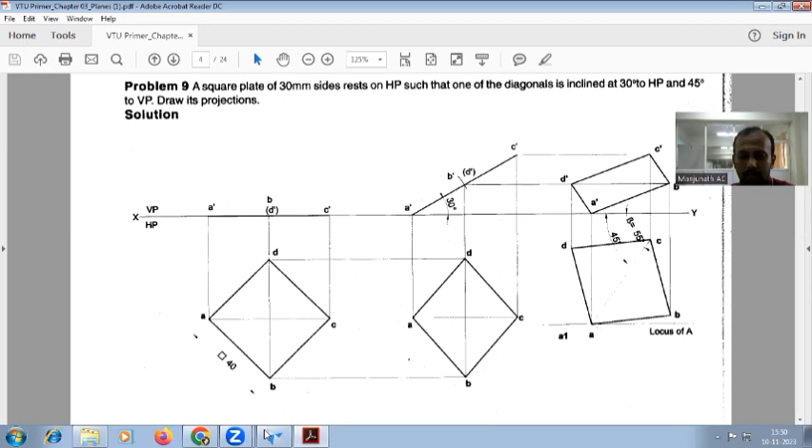So let's start the diagram. Choose the rectangle command. Give the width as 30 and height also 30. If you give the angle 0 degrees, the square will come with respect to edge. If you give 45 degrees, the square will be converted to corner. Our requirement is with respect to corner, so give the angle 45 degrees here. So the square will come with respect to corner. You can check the dimension of any one side, 30 according to the question.

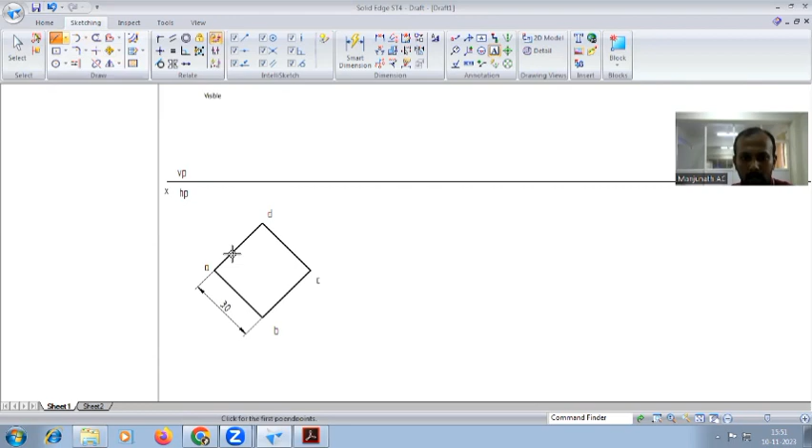So go for naming. This is A, this is B, this is C, and this is D. So the top view of the square plate is over. Next, you can go for the front view, projection of all the lines to the XY line. Projection of B and D in the same line, projection of A and projection of C. The projection lines' thickness will be less. So go for smart dimension and check one side of the dimension.

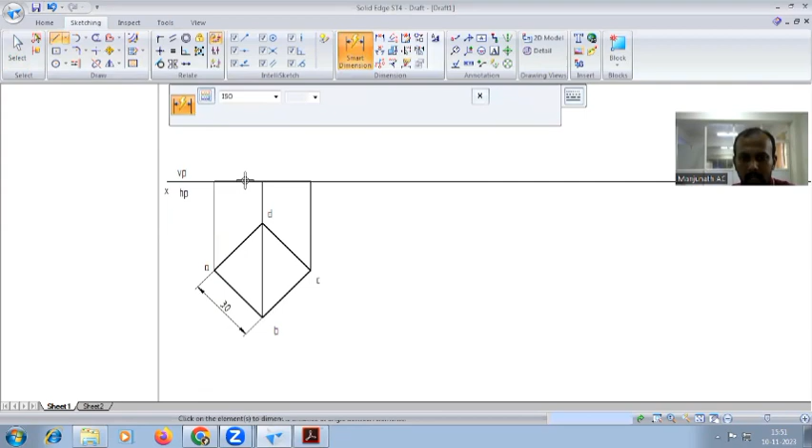After this, you can go for line command and select the projection of A to the projection of BD and projection of C. You can draw two lines here. You can go for smart dimension and check it. Both are 21.21, 21.21, the same distance.

Okay, go for the naming. This is the projection of A, this is A dash. This is B dash, and also D dash. D dash is not visible, so inside the bracket, and this is C dash.

So next position, you have to incline the plate at 30 degrees to HP. How to incline? Go for the line command. This line is initially 0 degrees; you have to incline it to 30 degrees. What is the distance? 21.21, 21.21. Select the XY line, give the length 21.21, enter, angle is 30 degrees. Again 21.21, enter, angle 30 degrees.

So go for the smart dimension. If you want, you can check this one, 21.21 and also 21.21. Check the angle also with respect to the XY line. So this line to XY line is 30 degrees. So now you can go for the projection of top view. This is the front view after inclining to 30 degrees.

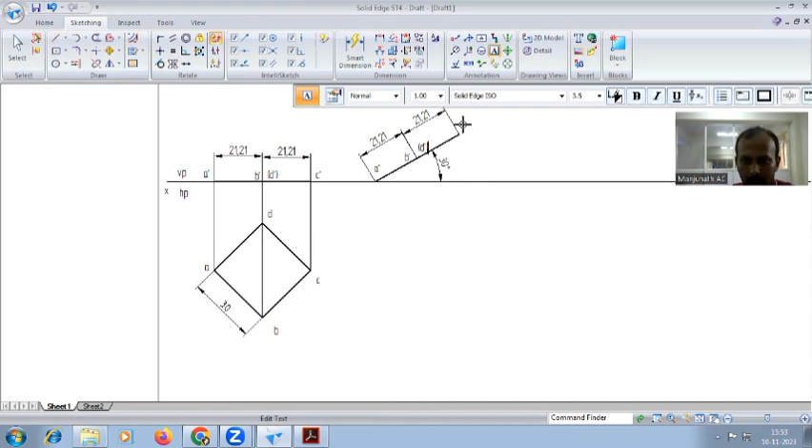Before that, naming is very important. This is A dash, this is B dash, and this one inside the bracket is D dash. And finally this one is C dash. Naming will be the same as it is. You have to type it, and then go for the projection. Projection of A, projection of B and D. You can see the endpoint symbol, projection of C. Projection of A, B, D, and C.

So look at the endpoint symbol. If it does not come, you can switch on the IntelliSketch. All IntelliSketch options should be switched on. So this is the projection of A to the first line. Next, projection of B to the second line. Projection of C, you can extend this line to the third line. Then the last one, projection of D. Always choose the endpoints. You'll get the 4 points.

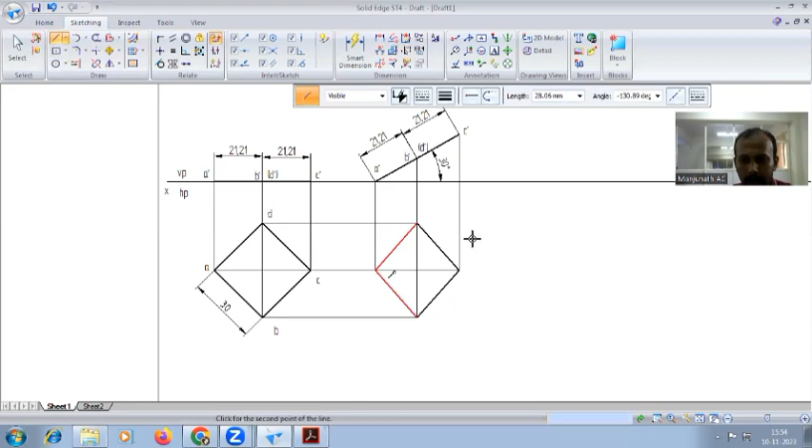If you want, you can go for trim command and trim this, so all the lines will easily get endpoints. Go for line command. Change the thickness to 0.5. So from point A, endpoint to point B, to point C, to point D, and to point A. So this is the square after inclining to 30 degrees. Naming A, B, C, and D without dashes in the top view.

And finally, one of its diagonals is inclined. For the diagonal, you always have to consider the left reference point. So A is the reference point. So from A, which diagonal passes? AC is the diagonal.

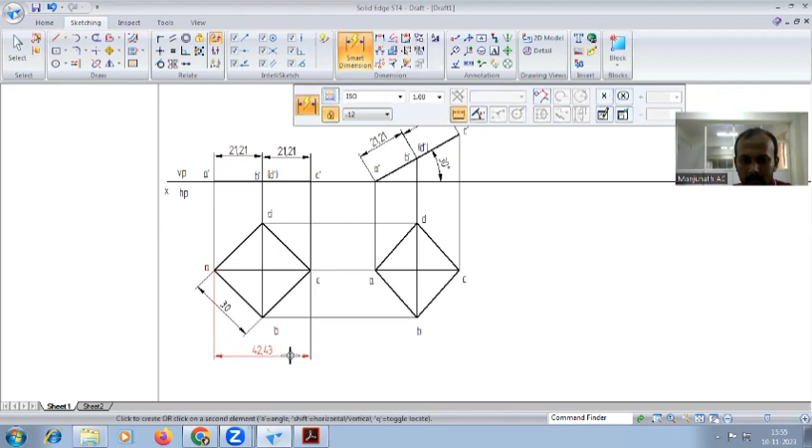You have to draw the separate diagonal line here. So A to C, one diagonal line, endpoint to endpoint, and here also A to C. So here we check the smart dimension. This dimension is different. This dimension is different.

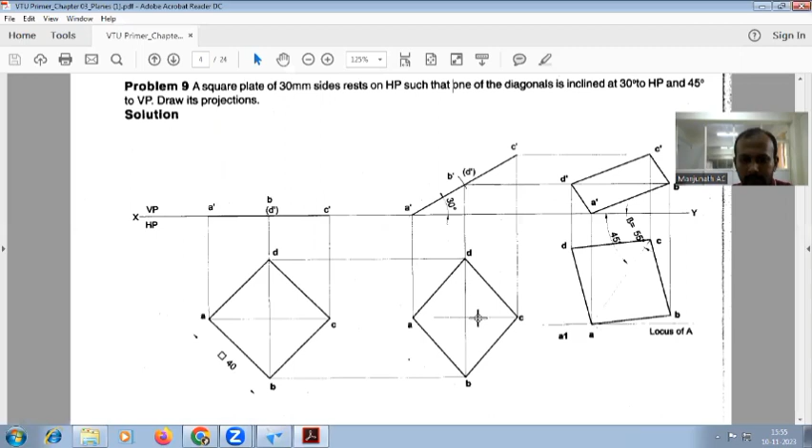The question is given 45 degree to VP, one of its diagonals. Correct. So here the diagonal is 42.43. For that one, 45 degree angle is given. For the second diagonal, you have to find out the angle. That is called the beta angle. Why we call it beta angle means this is the true length. The first diagram has the original distance, this is called true length. This is called apparent length. You have to find out the apparent angle also.

Then go for line command and you can check this one. Angle is 45 degree. Correct. So you can draw the 45 degree line, select it and choose the minus 45 degree downwards angle. Draw the line like this. And what is the original dimension of the diagonal? 42.43. So start anywhere. 42.43, enter, minus 45 degree angle. You can check the dimension 42.43.

So what is this point? Which diagonal is this one? AC, correct? You can go for the naming. So top is the A, bottom is the C. Then you can go for the line command and draw the locus of the C. Draw simply like this, horizontal line. Make sure the thickness will be small. Then select this second diagram. You have to place this one on the 45 degree angle line.

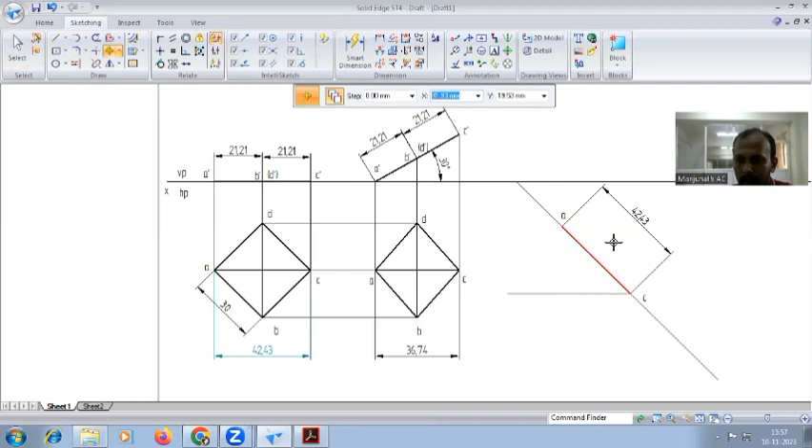So how to move this one? Very important. Go for move command. Select the copy. Always you have to highlight the copy. You should not select any line here. You have to select the corner A. Place it to the point A. Then go for rotate command. First select the A and select the C. C is the diagonal, correct? So you have to place it like this. Zoom in and place it exactly on the line properly. Place like this, fit the page.

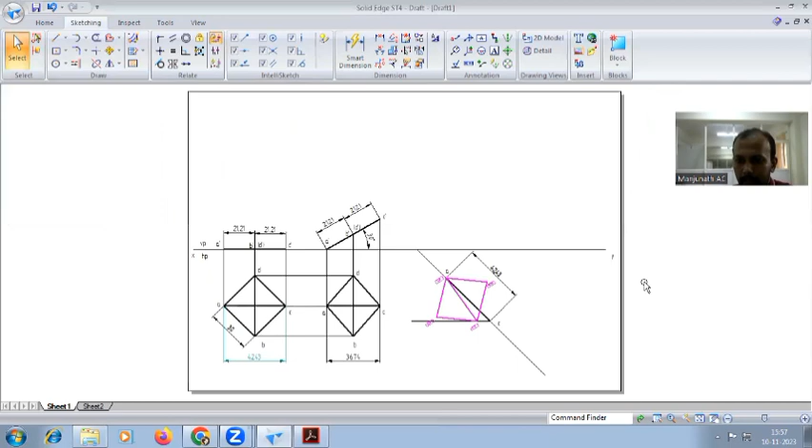You can observe now. So AC is 42.43 and this one has the dimension 36.74. So I'm erasing the double naming here. You have to find out the angle. So go for extend command near to the circle command. Select the other diagonal AC. It will extend to the XY line. So go for angle. Originally we are given 45 for the true diagonal, and the beta angle is 55. So this is the true angle, this is the apparent angle.

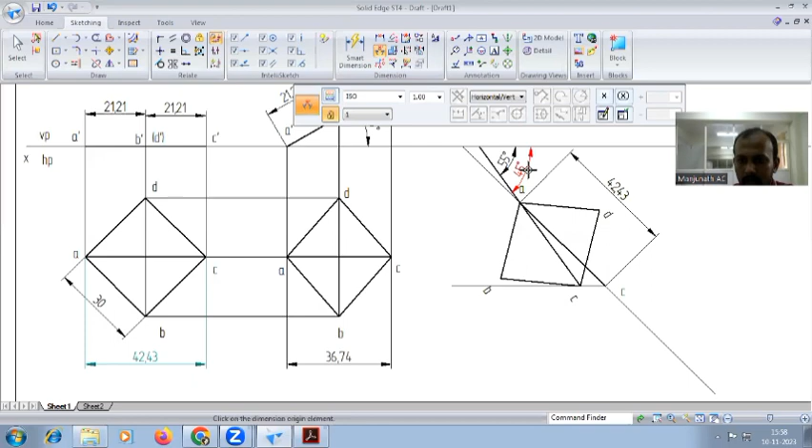After inclining to 55 degree, you have to draw the front view. The top view is over. You have to go for the front view, how it is visible. Go for line command. So this is the point A. Projection of A is the XY line. Projection of B will be the second line. Projection of C is the third line. Always choose the endpoints. Select it, make it 0.13, thickness is less.

Now we have to draw the other projection from the top view. So where is the point A? This is the point A. Always go alphabetically A, B, C, D. Select A corner to the XY line because the projection of A is on the XY line, straight line. Then you have to go for B. This is B to the second line straight, and C to the top line. This is the projection of C. Don't use this point, this is true length. We are not using true length. We are using the apparent length.

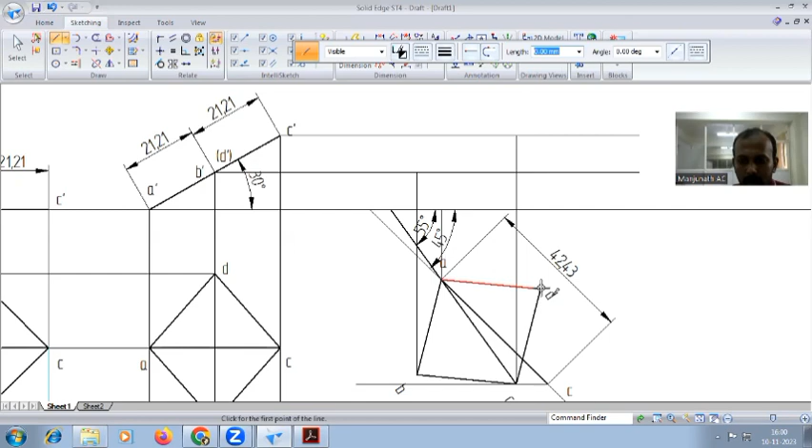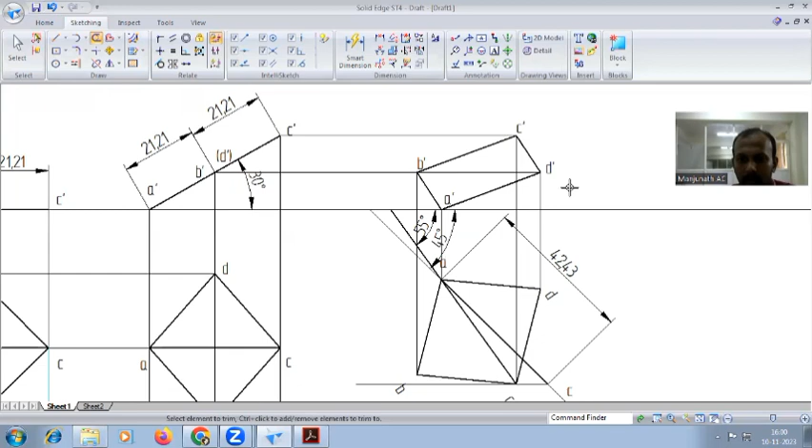So go for D. D will be the second line. After this, you have to go for the naming. If not properly named, you can't join the lines. This is A dash, B dash, C dash, and finally D dash. So join the points using dark lines. Use the end points. A dash to B dash, B dash to C dash, C dash to D dash, D dash to A dash. I'm trimming the extra lines so the diagram will be easily visible. This is the final diagram after inclination 30 degree to HP, 55 degree to VP.